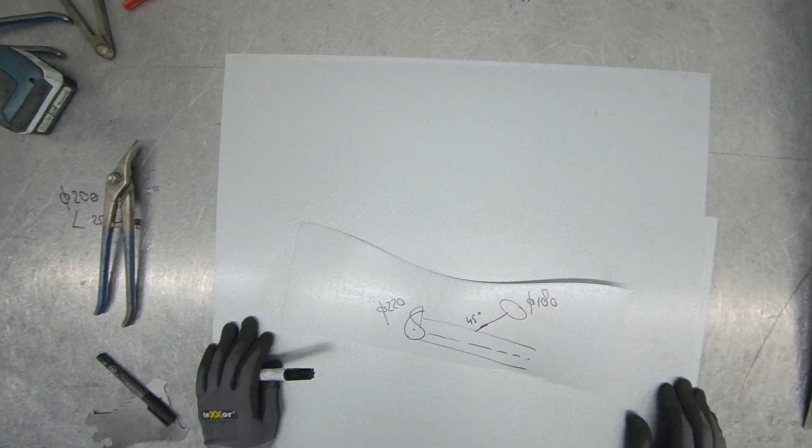Now, first what we're going to do, as always in every video, there are some things that are always the same. So diameter 220, half radius is 110. I'm gonna take here 110, just here make a circle, and the smaller diameter 180, that means 90.

So now we're going to divide the smaller circle into 3 parts. So we got here number 1, number 2, number 3, and number 4.

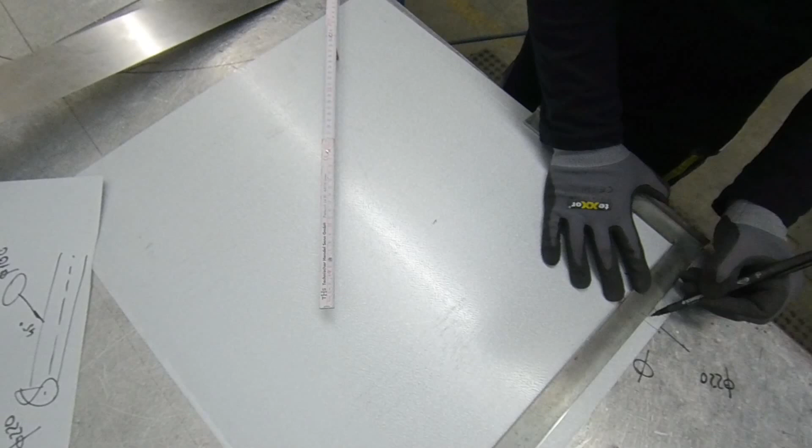Then we go to pull up those lines. So this is actually here, say, one line, second line, third line, and here the last one, fourth line.

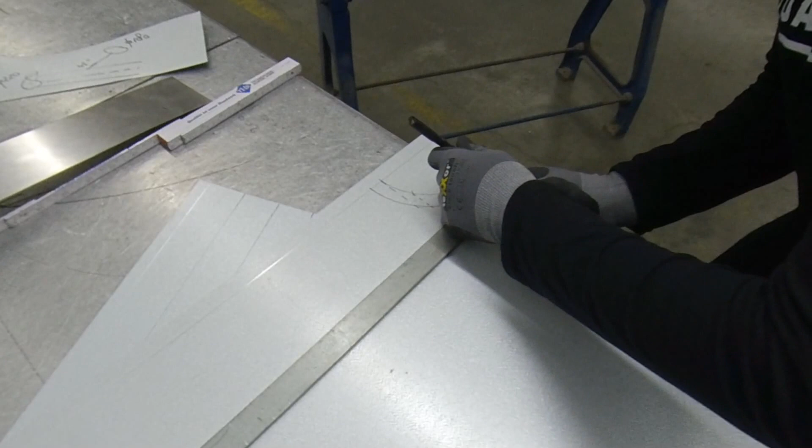Okay. Next, what we're doing, from that big diameter, we're going to pull up those lines 90 degrees in the other direction. Like this.

So what we've done till now is we make this small circle, divided the small circle, and those points from where we divided, we pull up those lines where they cross the big circle. From these points we're going directly 90 degrees to the side. If you do it from the left to the right, or from right to the left, it's the same thing.

Or you need something like this, and you put here's 45. So see, it's the same.

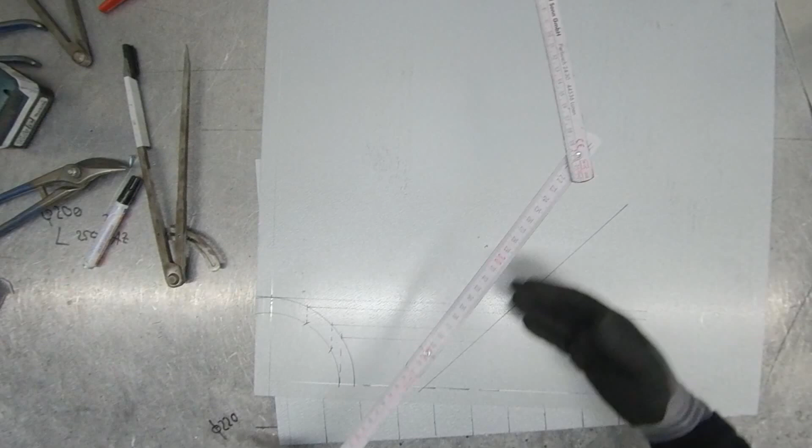Then I just put somewhere the line, and I'm gonna make the line a little bit longer. So this line here is actually the center line of the diameter from 220. That's the center line. So we need a length, I'm gonna just take a random length from 300 millimeter.

And now I need a line exactly 90 degrees from this line. So, just gonna make it a little bit longer.

We're gonna divide here to make exactly the middle. One side, and from here, something you'll also learn in basic school, I think, things like this. And now this line comes exactly. So we have here this line exactly 90 degrees.

Then we're going to make here the small diameter. Therefore, we need this size again, and also divide it. So we have those 6 parts.

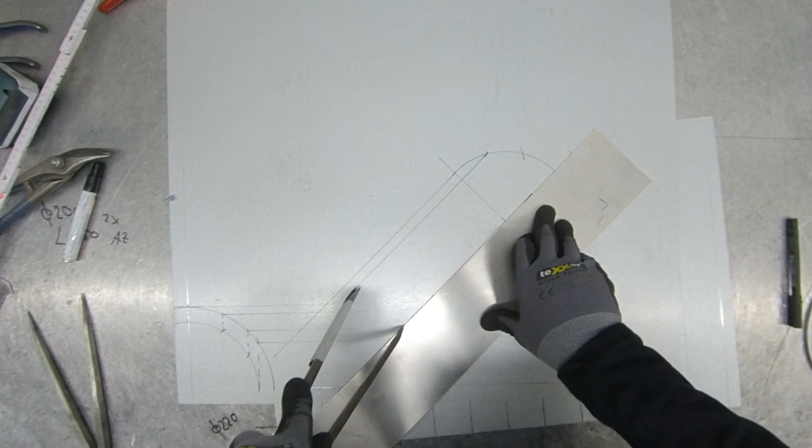Now we need those lines also pulled up down 45 degrees, just like the middle line, and therefore, well, the easiest way is just put your metal here on this, and then this size here, pull it down. Next one, and this one.

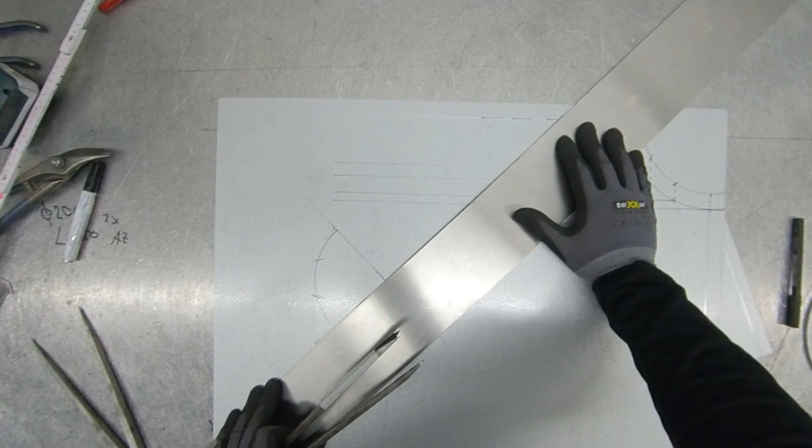And we're going to do the same thing on the other side. So I'm going to turn the metal, it's easier for me. Same thing. And the last one.

Okay, so we're almost done. So these are those points. I'd rather number these as these because it can be confused: 1, 2, 3, 4, and then we go up 1, 2, and this one 3. Okay, so we give them numbers.

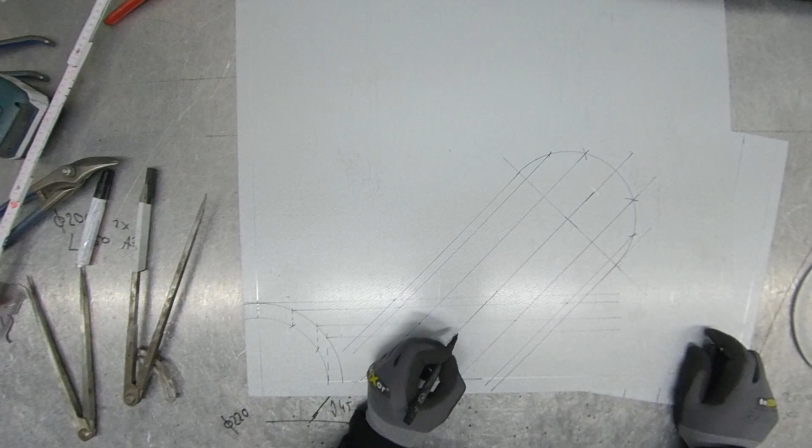We're gonna have a separation in the middle line. So the middle one is number 4. This is gonna be number 5, 6, 7, and here we're gonna take number 3, 2, and 1.

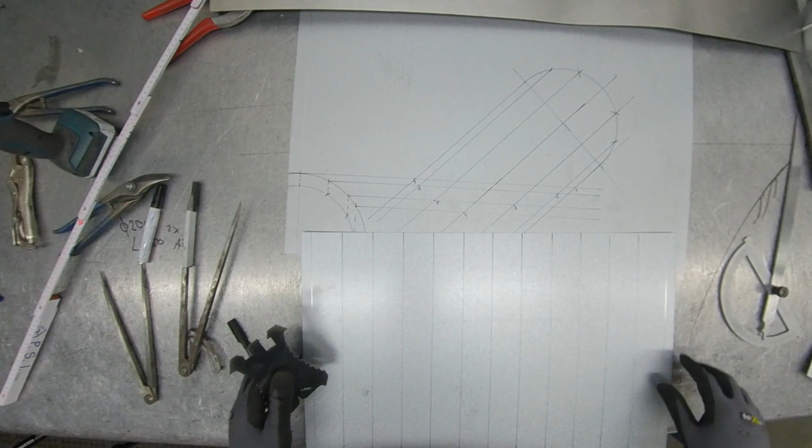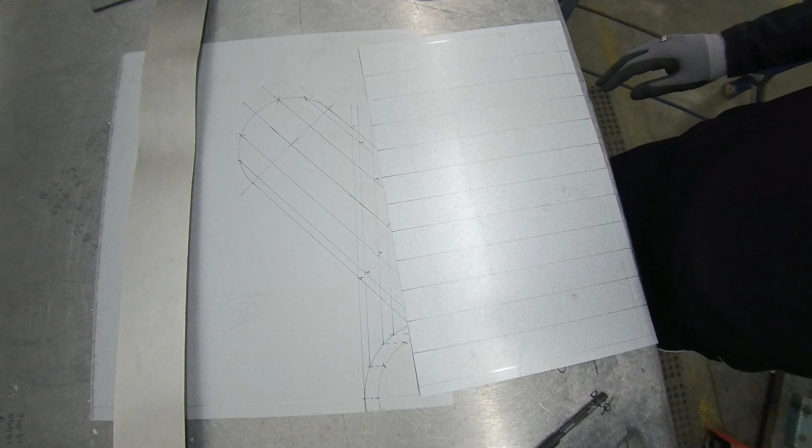Then you take your metal. I already divided before, so I'm just gonna take 20 millimeters working line to bring it over. So normally it's from the middle line until the tip is 300, so here it is 320. You can also cut it later off, but it's easier to put off my bow divider for those points.

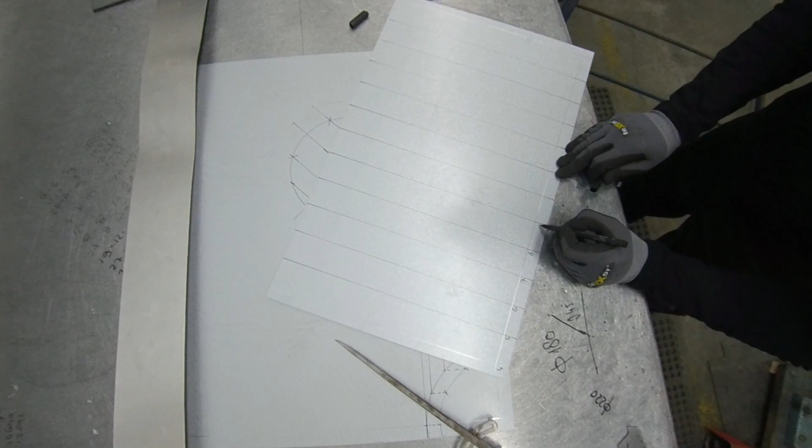So number 4, we're going to start with number 4. Number 4 is where the separation is. Oh yeah, forgot to number it: 4, 5, 6, 7, 6, 5, 4, and then 3, 2, 1, 2, 3, and 4. So it's easier. Okay, we set number 4 here, number 4 in the middle one, and at the end here we got number 4.

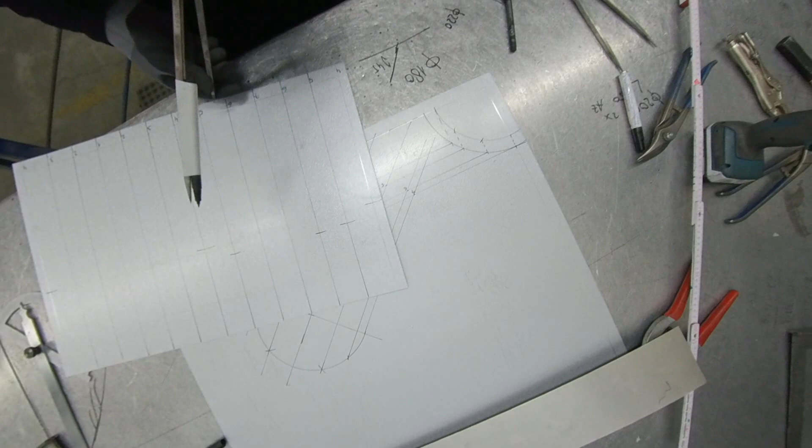Next one is number 5. Now it's just taking those sizes, looking what number. I mean, it's not so hard, it's always the same procedure. Six and 6. And now we got number 7.

Also small difference between those lines. And now we go down, means number 3. Number 3, number 2, and finally the last one here, number 1.

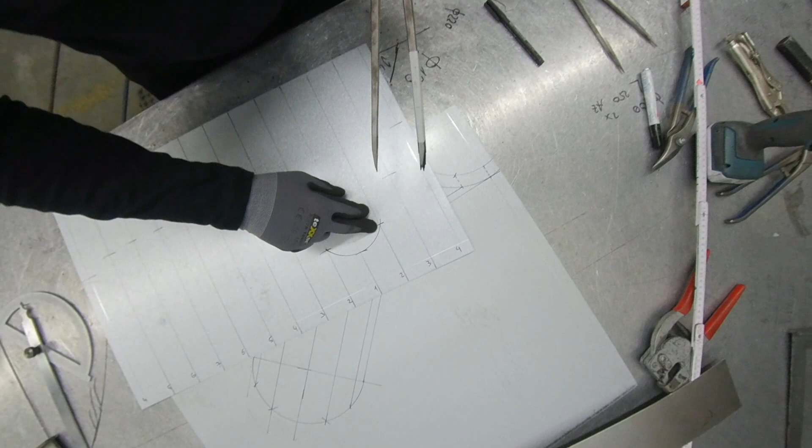I mean, it doesn't matter with what number you want to start. With number 1 mostly, not always, but with number 1 you can already have this radius here. It's normally an ellipse, but with the flat swage we can compensate it. So we equalize, and now the rest comes.

Now next thing is, because we're gonna use this, we're gonna give some swage allowance, and that's, in this case, we're gonna give him 15mm swage allowance. So I'm probably gonna speed up this part.

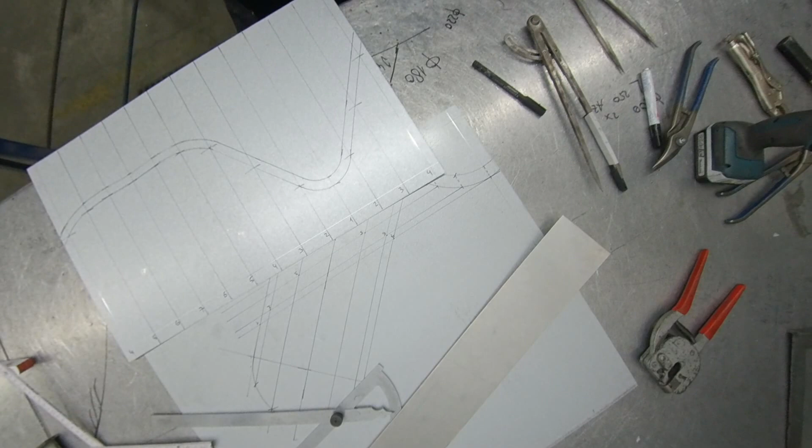Okay, now time to cut it out. So, this is it. I hope. Now I'm gonna make here some holes.

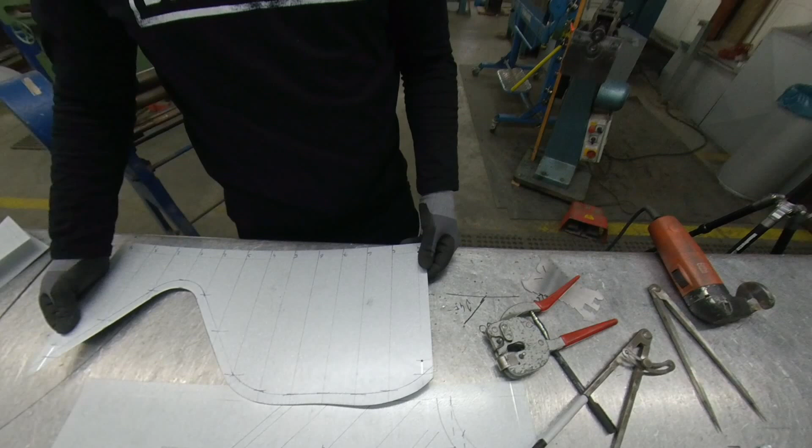Now I'm gonna put here a swage or just a kink, then gonna round it. Well, here we're gonna do it on this machine very quick. Just a kink, it almost looks like a swage. Normally you put a swage in, but for the video.

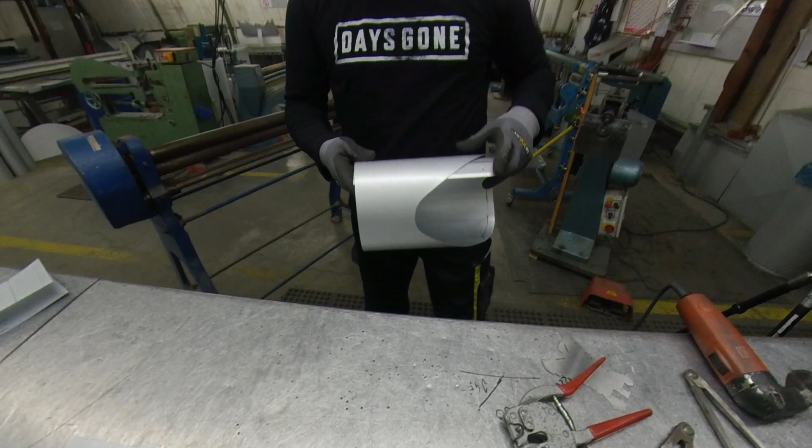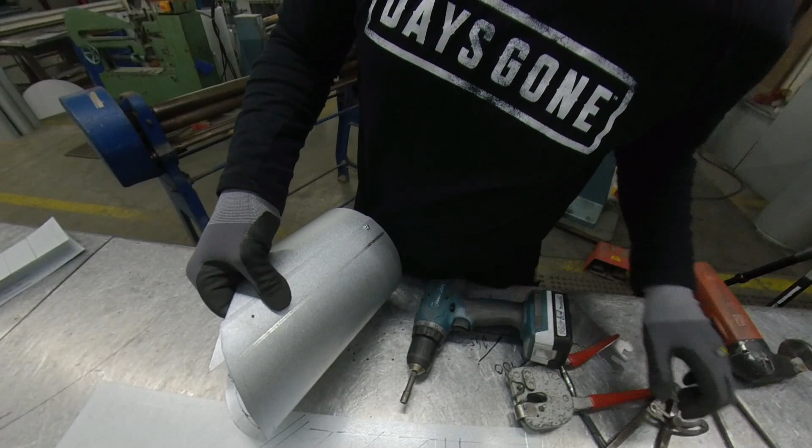Got stuff. It's an old rounding machine, nobody uses it, so... where is the other screw?

And here I'm gonna cut from this edge till here. Okay, that's it.

Almost done. Now the most interesting part comes: making the flat swage on a 45-degree T-piece. Okay, let's do it, let's do it.

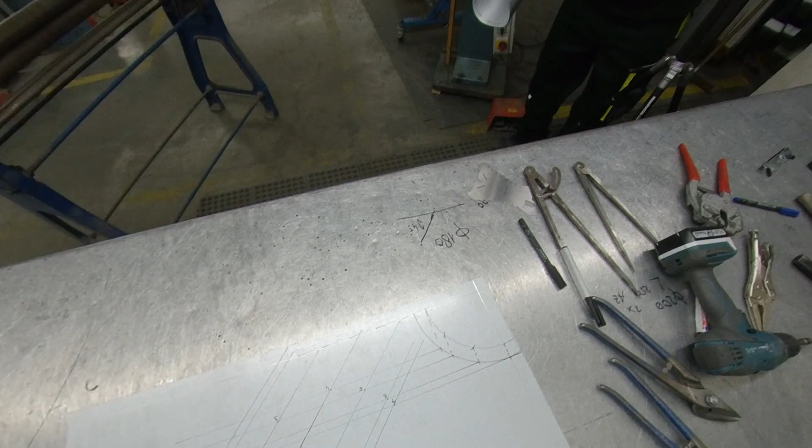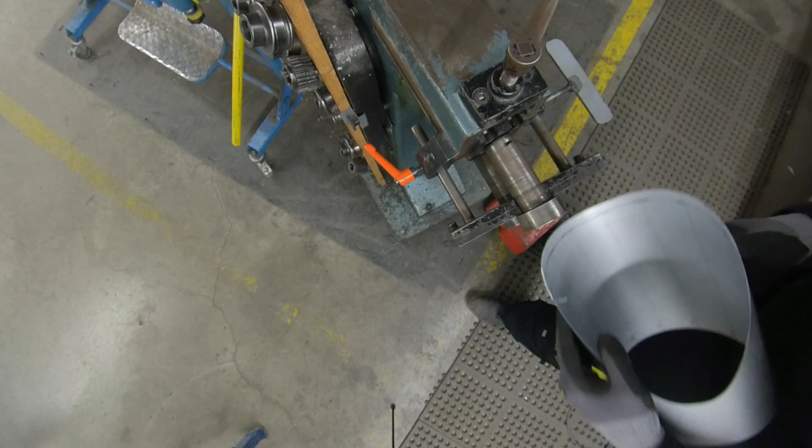I hope it's okay. So I'm recommended to put the machine in slow. Okay, now...

Here goes, everything goes normal, and now I'm pulling here this a little bit in this direction, giving it more, squeeze it more. And then we go back.

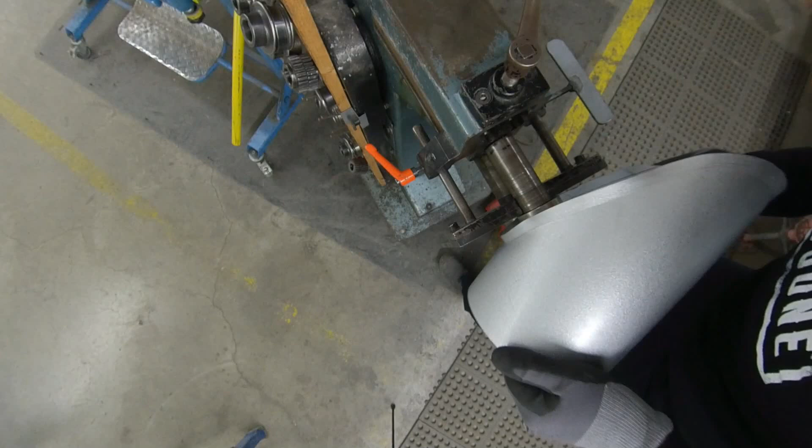So now we're continuing only here in this part, but not grabbing it completely, we only take half, to avoid getting scratches here in the smallest part.

Okay, now we're gonna make a little less pressure. And here you go, 45-degree.

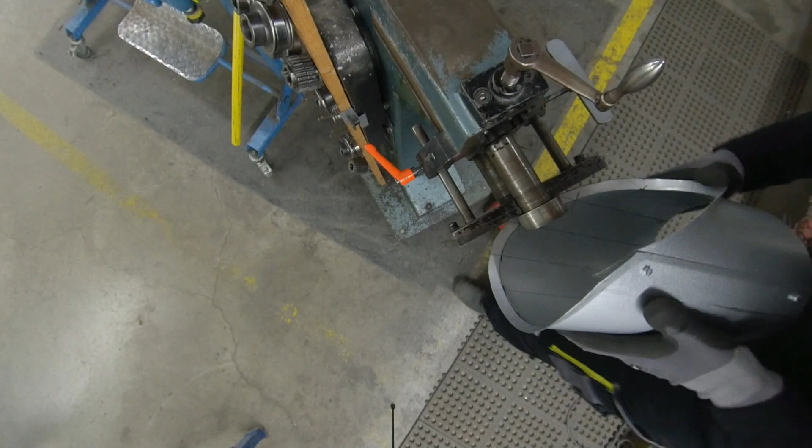And here a little bit more again. We make it here, practically we over-round it, so we can with the hammer hold it a little bit, bumping on it.

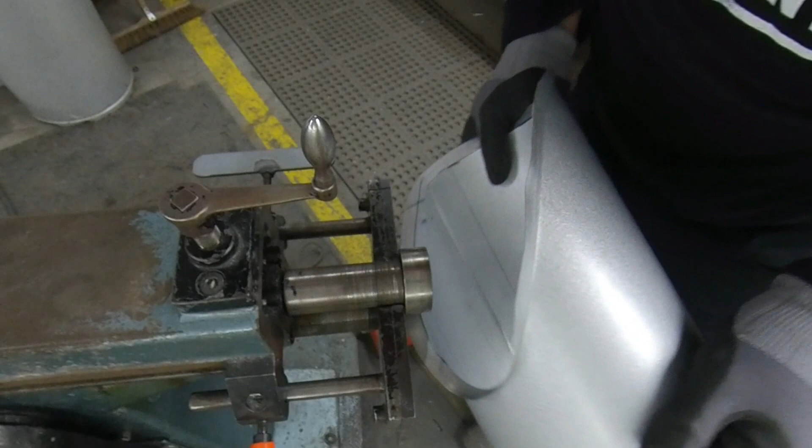Okay, until now I think it looks good. Just a little bit more. Well, this is actually the hardest part from the 45-degree T, because it takes, if you're a new sheet metal worker, a little practice. Got to be honest.

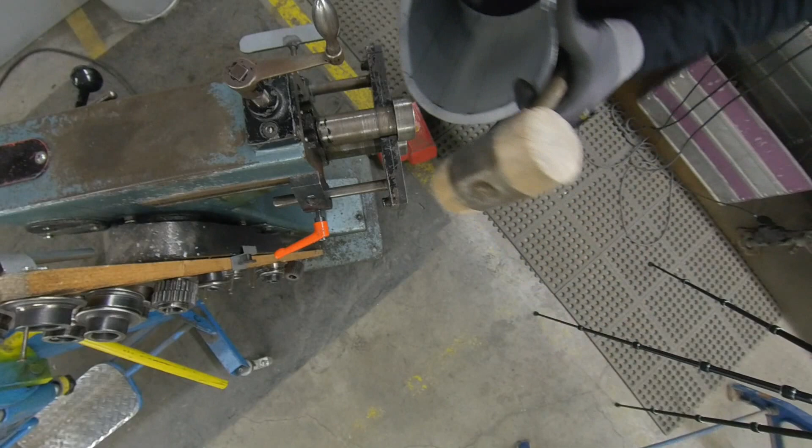So now I'm going to punch here with this wooden hammer. I think it should be okay. So we're going back here again.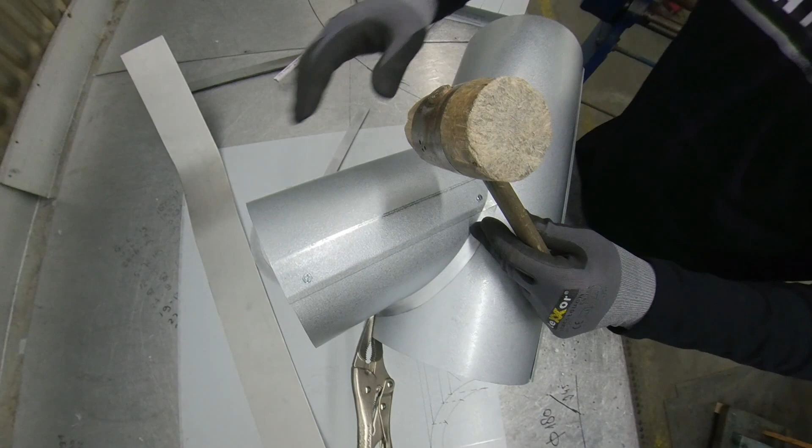So now I'm gonna check this out here, just to hold it, and I don't know if it is possible to see in the camera. It's okay. Sometimes you have to punch a little bit with the hammer.

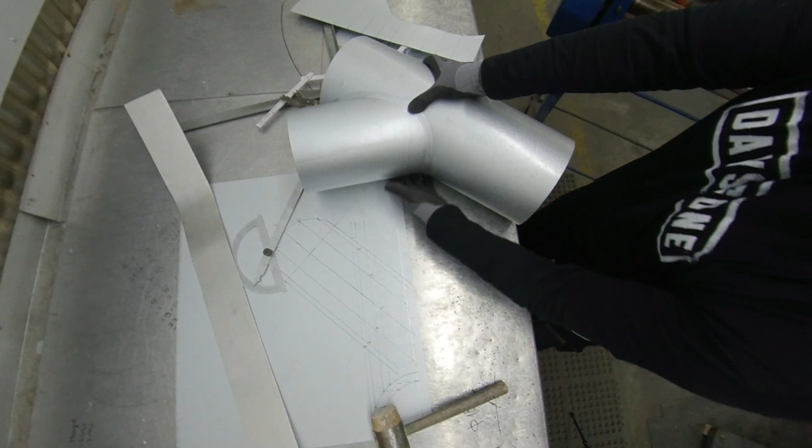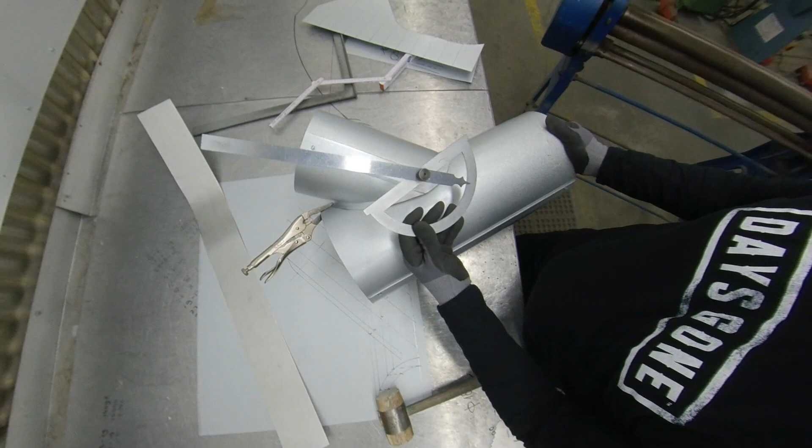45-degree. Okay, I don't... this may be something you can see from here. It's the right angle, or maybe like this. Well, that was, or is, the 45-degree T-piece.

But we're almost done with the video, because I'm gonna also show you how to make this cutout from the pipeline, if you're interested.

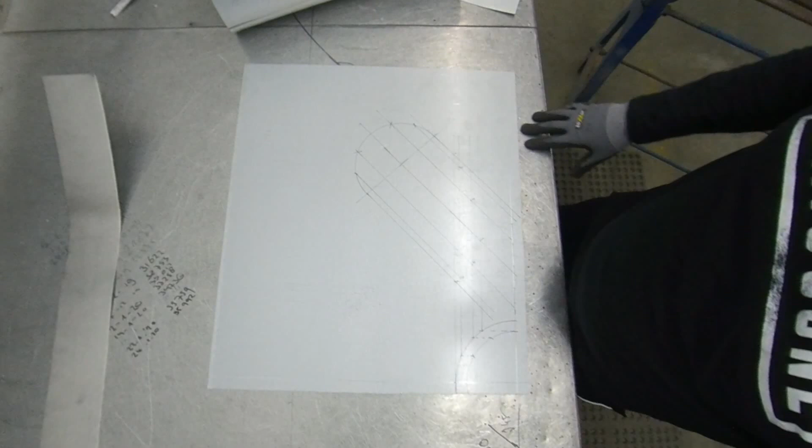So what you're going to need from the cutout, if you want to make a cutout, and by the way, these are the same cutouts you can also do on other T-pieces. It doesn't have to be at a 45-degree angle. It can also be 60 degrees, 30 degrees, or just a straight 90 degrees.

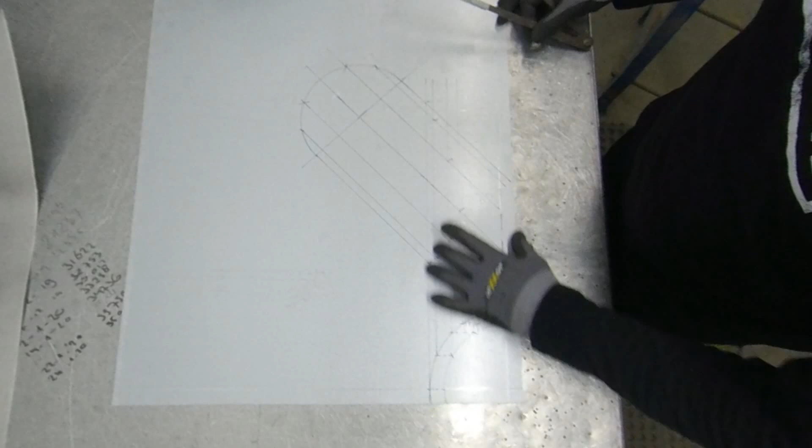So what you're going to do, if you have an equal 45 degree, you don't separate the small diameter. You just divide the big diameter and pull those lines. So then you have one line: this one up, and this one should be down, and then it goes from here back. That's the only difference, so there's not much difference between small and big, or equal and unequal.

So with an equal, you divide the big one into 3 parts, pull up these lines to the side. You don't need to do the small diameter, and you'll have one exactly here, here and here, and this will be number 4 if you do an equal on equal.

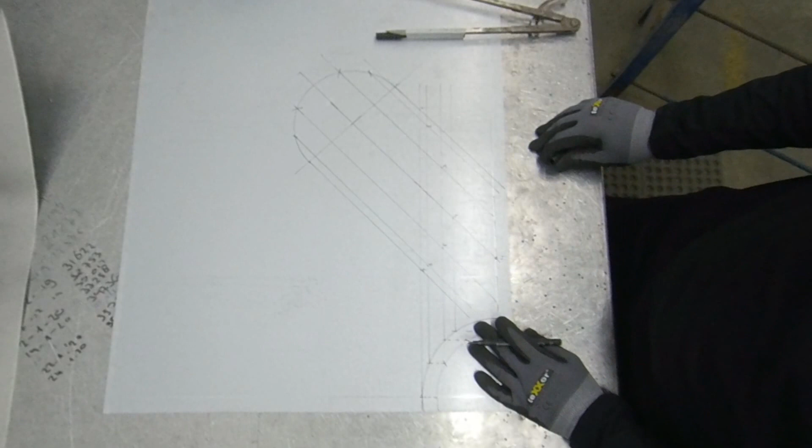Now, what we're going to do is this part here, take this, this is one, so I'm just gonna put it here, and then you take from the outside, from the big diameter, this part.

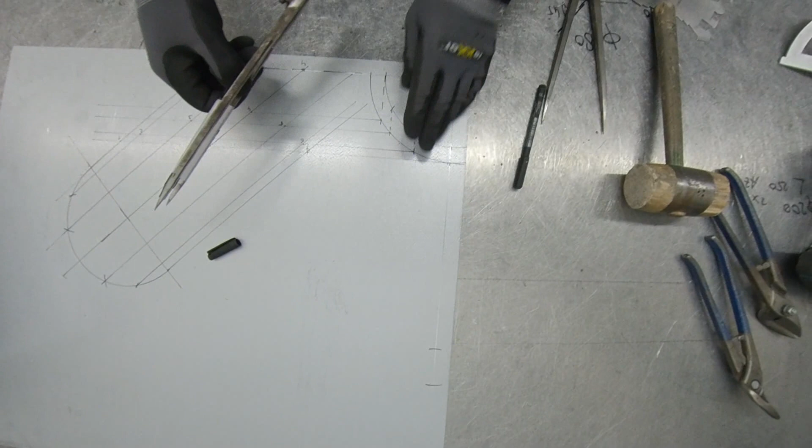I'm gonna put the camera a little bit down. I think it's okay. So now we have this part, and the last part, the smaller one here. So this circumference here is from here till here, same separation, only here in one line.

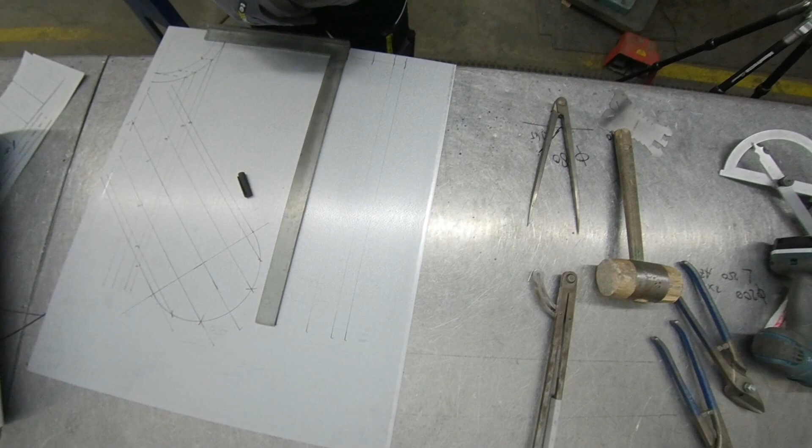Then we take this angle here, pull up those lines up. I mean, this is extra, I honestly never use this, but you never know who's watching and who's searching for something.

Maybe for somebody else it's useful, and maybe you don't need the T-piece, but you need the cutout. Now I'm gonna just make these lines a little bit longer.

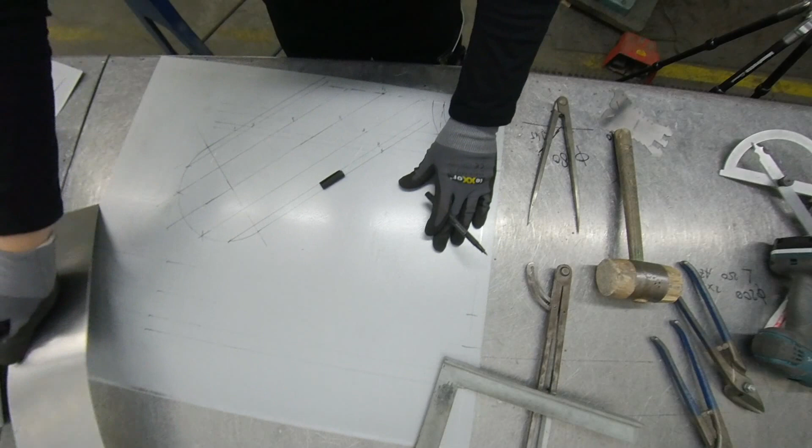So now what we do is those points here we have from the T-piece, what we've done before, we're going to pull them up. So number 7 is here.

So next line, next point, next line comes here. Then again, next point, next line here. And the last one, number 4, is the outside.

So now we go back here. Number 3 goes up, it's this one. Number 2 is here, and number 1 we've got here.

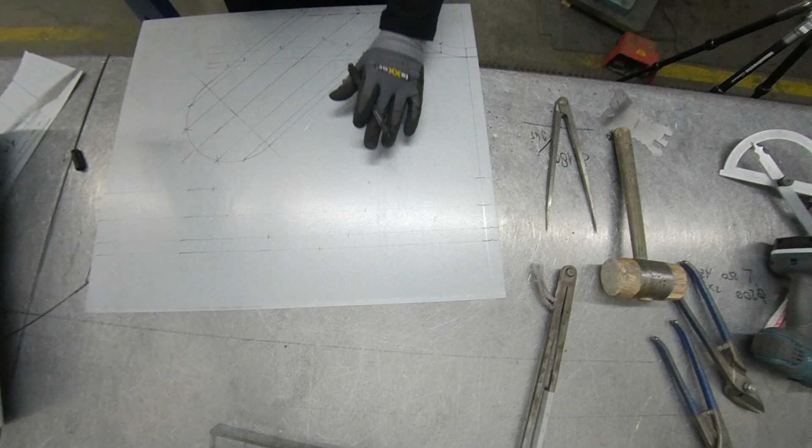Okay, now we're going to connect those lines. So this part now here, if you cut it out, you have a model from the exact cutout from your T-piece 45 degree.

Okay, well, with this I think it's complete, everything I wanted to show about a 45 degree T, or any angle you want. Okay, well, another video about sheet metal workshop for insulation fabrication, and well, see you next time.